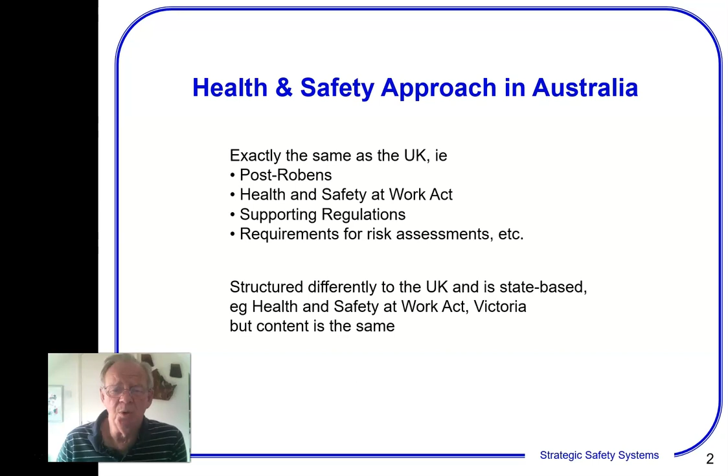So there's a Health and Safety at Work Act for Victoria, and there's a slightly different one for Queensland. For example, Victoria says there's a duty of care, in Queensland it says there's an obligation, but the same things are the same. You've got supporting regulations, much in the same way as we've got the COSHH regulations and the management of health and safety regulations, and there's a requirement for risk assessments, etc. So all of that, it's very much the same as the UK.

If we're just looking at the sites that we've got here, I'll mention this one. This is Comalco Minerals and Alumina. I should stress that I was working for Comalco, which was one of the companies within CRA, I'll talk about that in more detail. That's Comalco's Minerals and Alumina, they're at Weipa, and it's a site where bauxite is mined.

There's another one down here, Boyne Smelters Limited, BSL. It's a site which is managed by Comalco. I think Comalco got, or had, a 50% interest in Boyne Smelters at the time. It's an aluminium smelter, so we're taking essentially alumina, which originates at Weipa, and turning it into aluminium there.

We've got a site down here, Comalco Rolled Products in Yennora, a suburb of Sydney. They take solid aluminium, either as purity metal or as scrap, remelt it, cast it into blocks of about 8 tons, and those blocks are then rolled down into sheet material. There's two sites that do that: one at Yennora here in Sydney, and another one, Commonwealth Aluminum, at Lewisport, Kentucky, quite a long way away.

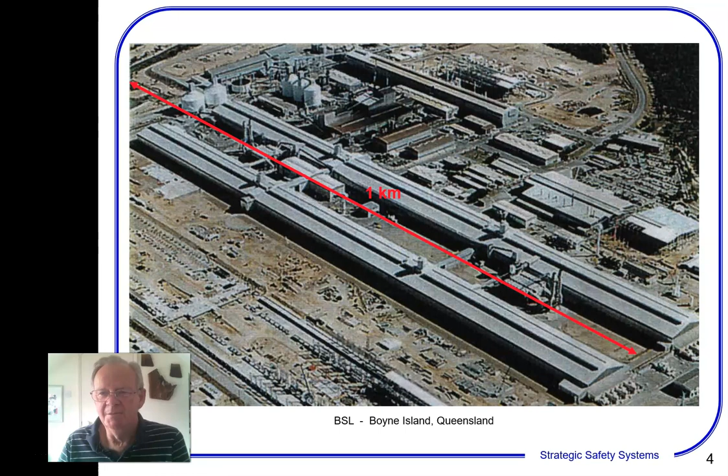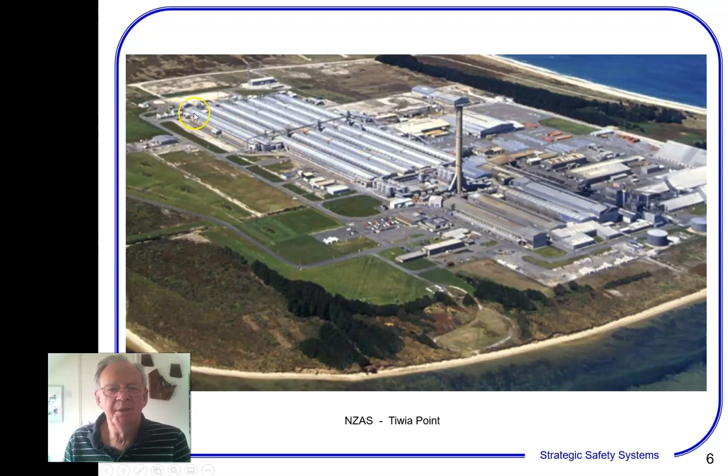If we look at that in more detail, you'll see there's again long sheds like this, 6 of them, 6 bays here, and you'll see why they are long bays like that. There's a 7th one which was added later on, and I was involved in that.

This is the kind of structure of personnel within CRA, what's referred to as strata.

Lots of people at stratum 1, so everybody was at stratum 1, everybody on the shop floor, etc. If you were to get a supervisor, a project leader, they would be at stratum 2. If you were like me and you were a manager, I was managing about 30 people at the time, then you would be at stratum 3.

So you could be a manager or a principal consultant at stratum 3. So here we're showing managers. I'm a manager of metal products and manager of carbon. You had another manager of reduction, etc. We go up to a site level. We've got the general manager who's at stratum 4, so we have a general manager for New Zealand Aluminium Smelters, another one for Boyne Smelters, another one for Bell Bay, etc. He was at stratum 4.

You also had chief consultants at stratum 4 as well, same level of complexity, the work of somebody who might have a plant with several hundred people there. At stratum 5, you had managing directors or vice presidents. So you had a managing director of Comalco Smelting, a guy called Carl Stewart at the time. You had a vice president of Comalco Research and Technology, a guy called Tony Kjar. I'll talk about him in more detail in a minute.

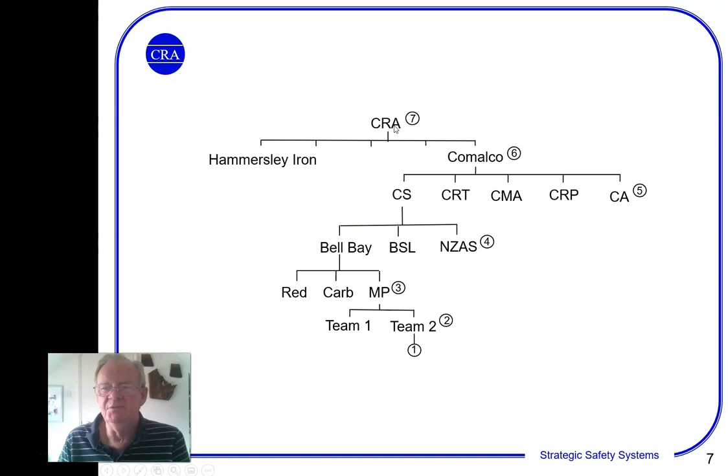Right, I'm going to talk about aluminium.

Comalco, the word Comalco comes from Commonwealth Aluminium Company. So we're talking about aluminium because that's where the dangers were that I was involved in. We start with this stuff, alumina, aluminium oxide, and you pump in a lot of energy to break the bond. And you end up with aluminium and oxygen. Right, I say lots of energy.

Well, how's that done? Well, essentially, we've got these kind of tubs here. You've got a case in there. It's got a carbon liner on it, and inside there we have a substance called cryolite, aluminium sodium fluoride, and that's at about 900 degrees C. And you dissolve alumina, your aluminium oxide, in there.

And coming into it, we've got these things which are anodes. And we pass an electrical current between the anode and the cathode, because that liner there, that carbon liner, is the cathode. The anodes get eroded away, so they get burnt away. So you'll see this one has kind of gone down a bit, and this one's a new one. And to keep this distance, the correct distance, this whole thing moves up and down.

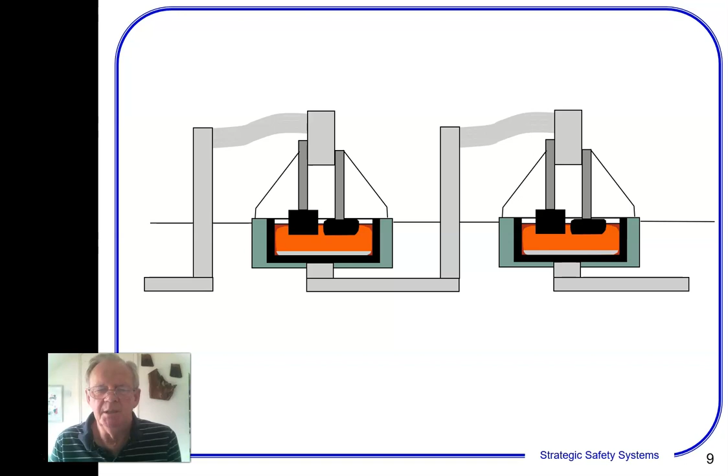Right, this is what it looks like in practice. This is a Comalco CD200 reduction cell. And these are new ones that went into New Zealand Aluminium Smelters. They're not the ones that were majority in use. That came in later. And you'll see this is the thing that goes up and down a bit in there.

Inside there, this is one of the cables bringing in the current. This is flexible. There are 3 of them. So you may guess from that, the size of that, you can get a feeling for just how big this thing is. But these, these are handles that you grab hold of to take those covers off. You may get a feeling for how much energy is involved by just looking at the size of that, and that's only a third of it.

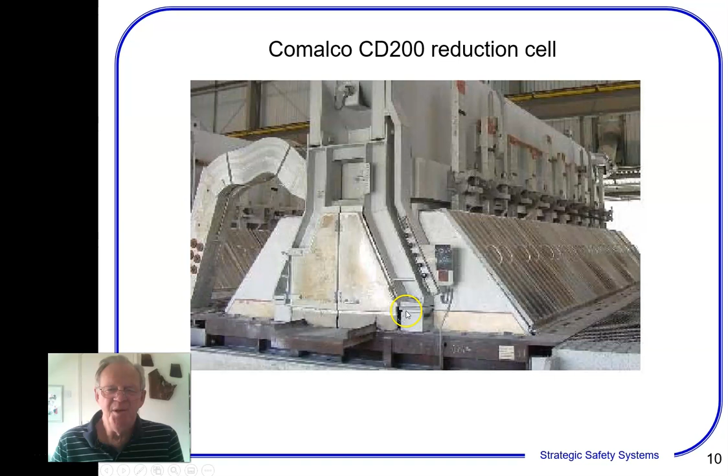And the actual energy you've got is that, this one is rated, the 200 in CD200 means that it can actually run at 200,000 amps. So there's 200,000 amps going through between the anodes and the cathodes, with a volt drop of about 4.2 volts.

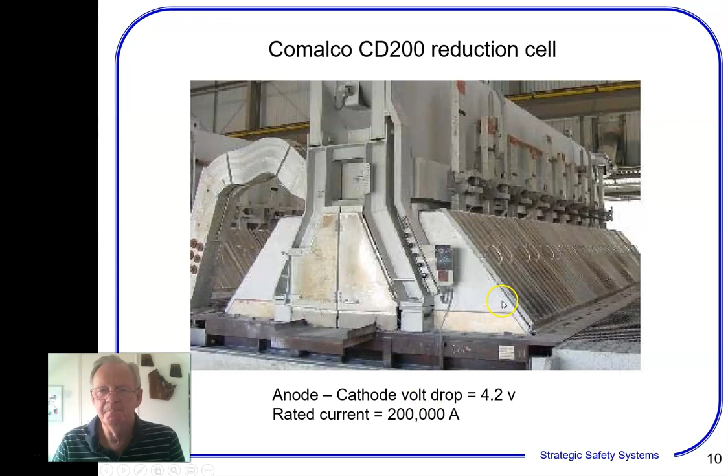In fairness, at New Zealand they didn't have 200,000 amps, they actually ran at 167,000 amps. But each one of those is about 750 kilowatts if you do the sums and multiply those up. So you're pumping in this vast amount of energy to produce aluminium and oxygen.

The only snag is that it can go back the other way. Aluminium can combine with oxygen to produce an oxide and release that energy that you pumped into it. It does this at any temperature, by the way, even at room temperature. The good news is that it only does it at the surface layer, so your aluminium in your aeroplane is not going to turn back into a white powder.

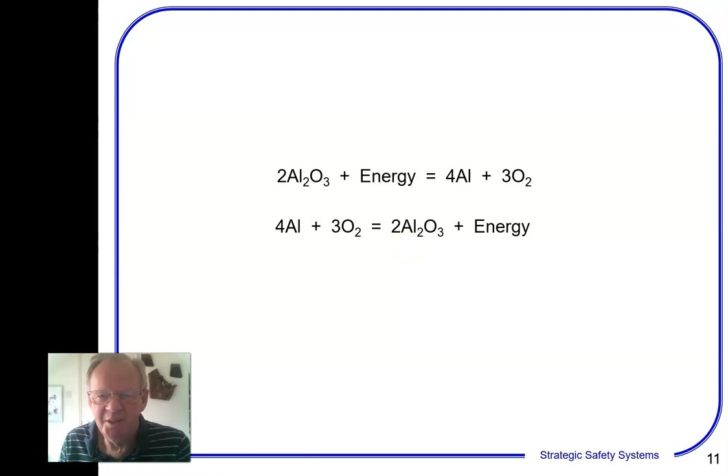It will only do it at the surface, so you've just got to worry about situations where you can get a new surface. As soon as you expose a new surface, this happens instantly as far as you and I are concerned, and you get lots of energy given off. Take something like molten aluminium - since it's molten it can do it at any temperature. It doesn't have to be hot to cause this, but it has to be hot to be molten. If you've got some kind of trigger which disturbs the molten aluminium, you get this kind of sequence.

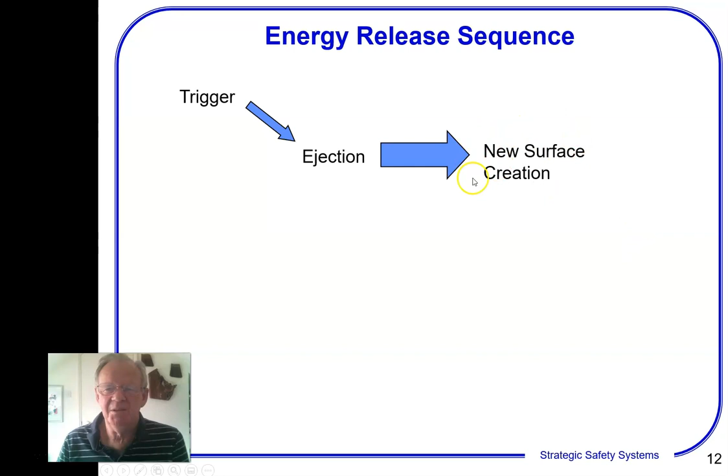The worst thing you can have is some kind of ejection - something which causes molten aluminium to be thrown up into the air produces a spray of molten aluminium, a lot of surface area, and instant generation of the oxide. So it gets thrown up into the air, a new surface is created, that new surface creation causes oxide to be formed, and that oxide formation means energy is released. Your nightmare scenario is if some of that energy goes round to eject more material, and then you get a runaway sequence.

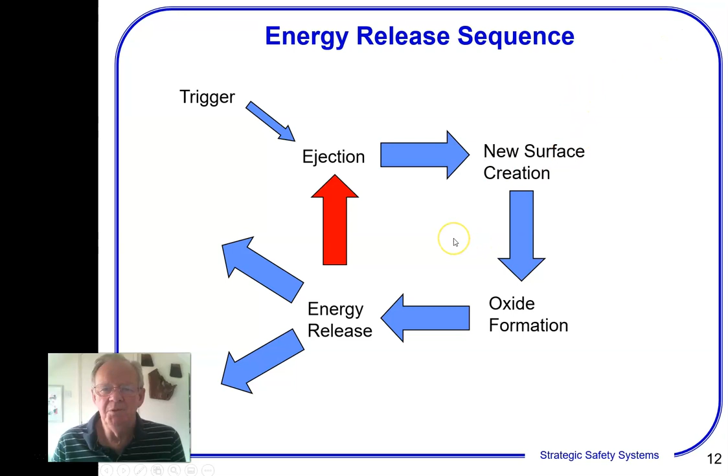You may call it a chain reaction. You get a runaway sequence, and you've got a major explosion. When I say major explosion, what are we talking about?

Well, this happened in 1979. As I mentioned before, Comalco Rolled Products melted scrap material and other purity material, and some of it had water running off it - it hadn't been properly dried. So it was about to be tipped by the crane operator into the furnace.

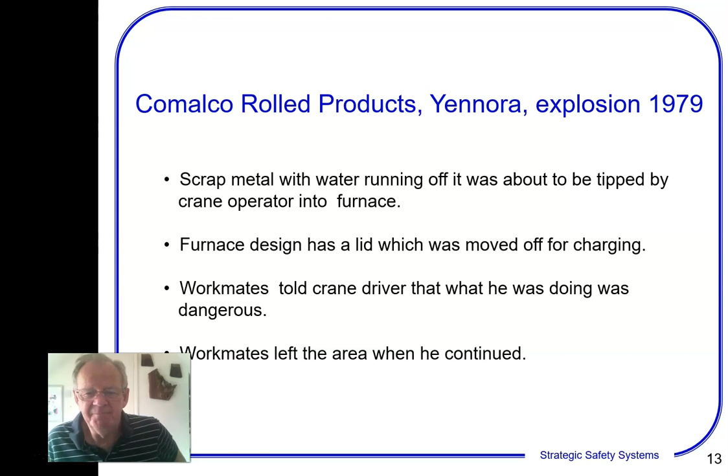Now the furnace design, as it stood at the time, was basically a round tub with a lid which was moved off for charging, and you dump the stuff in from the top. This guy was about to dump all this stuff in, and his workmates said, 'Don't do that, mate, that's bloody dangerous.' And he said, 'No, it's all right.' They legged it when he continued to do this.

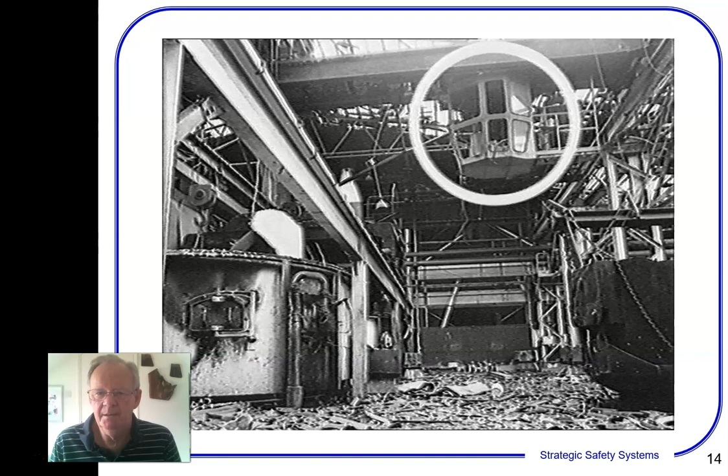And the result was this. The crane driver was sitting in his cab there. This is the furnace with the lid off it, and that's the level of destruction we've got within that plant. He was killed, obviously - unfortunately, not instantly.

This is another view of the plant. You can see how much destruction there is here. I don't have the picture, but I wish I did - but there is a picture that was taken inside this building, under this hole, and that's caused by a bit of block. Now when I talk about block, I mean this.

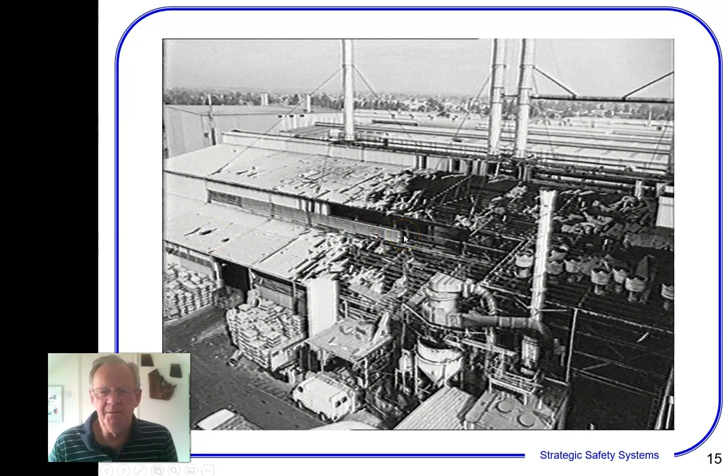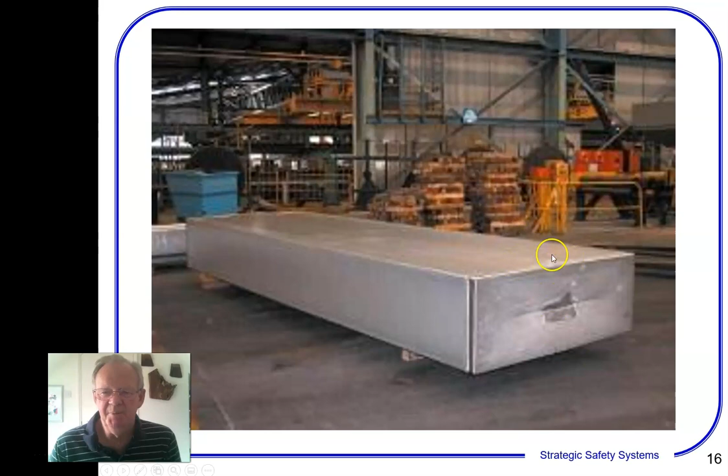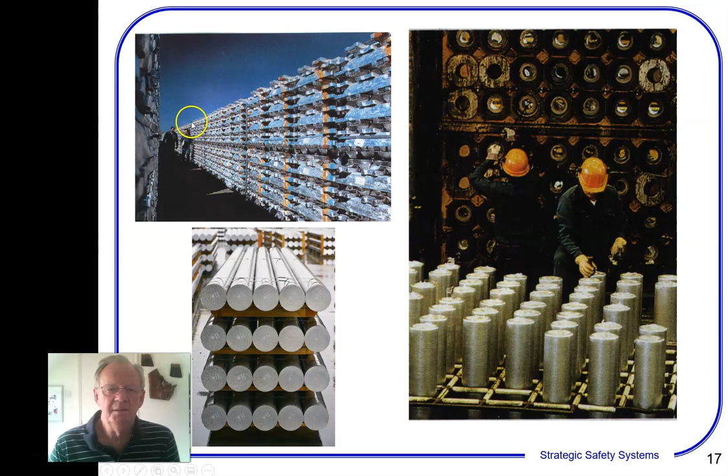This is ingot, which goes to be remelted. It's cast vertically.

The way it's done is through what's called vertical direct chill casting. You've got a furnace which you can tip up, and that goes into this trough, this launder, and it goes out to the mould. The mould is just this circular thing here, and it's got a base to it. The base is supported on a hydraulic ram.

You're pouring water onto this, so metal goes in and it starts to solidify, and as it does that, the ram descends and the product grows like that. You'll get water being sprayed directly onto the product itself, which is why it's called direct chill, and the thing will grow downwards like that.

You'd have as a product something like an 8 by 8 matrix of 172 billet, 172 millimeter diameter billet. 172 seems a bit strange, it's 7 inches. Strange situation there. That'd be about 7 meters long, or rolling block around about 5 meters long or so. The pit would be typically 8 meters here, and we've got water in the bottom of it.

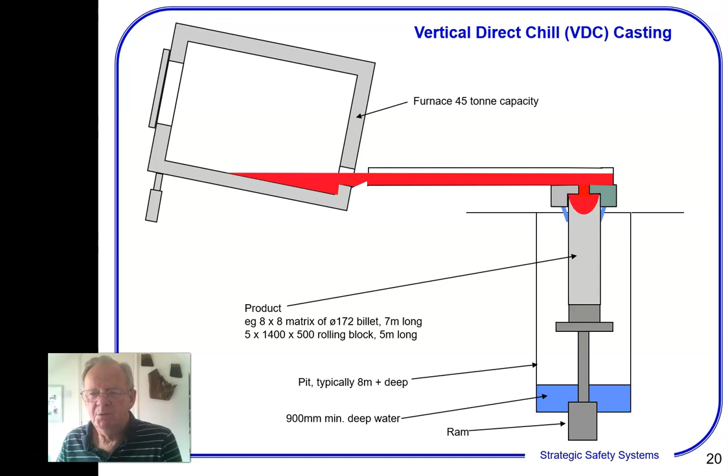Now, water and aluminium, molten aluminium, are not good bedfellows. If you put water onto molten aluminium, it's not a good idea to do it, but it will just sizzle and disappear. If you get water under molten aluminium, then it will expand dramatically as it turns to steam, and that expansion will cause the aluminium to be thrown out, and that's one of your nightmare scenarios.

Lots of things you can get here. As I said, you can get steam explosion with materials there, with bleed out into water or whatever. You can get a chemical reaction with oxides, because it will react with oxygen in any way. And there's another one which is a peculiar one here, which is lightning, which happened at one site.

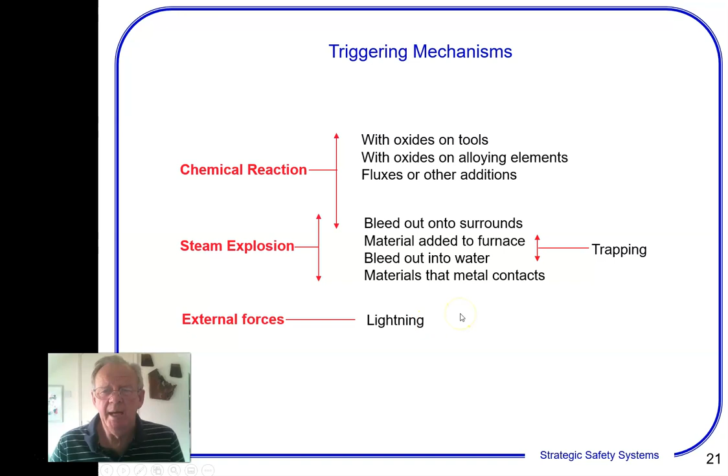Let's look at the types of aluminium explosions that we had. The one I've just mentioned before was at Yennora, our plant there, where the crane driver was killed, and that was caused by water. There was another one in 1986 where 4 people were killed at Simms Metal in Melbourne. That was caused by nitrates.

They were using sodium chloride as a flux, and that was being added to molten aluminium. But they also apparently used sodium nitrate within that plant, in the same kind of bags, in 25 kilogram bags, and it just so happened that somebody made a mistake and added bags of sodium nitrate to a furnace of aluminium, and up it went and killed 4 people.

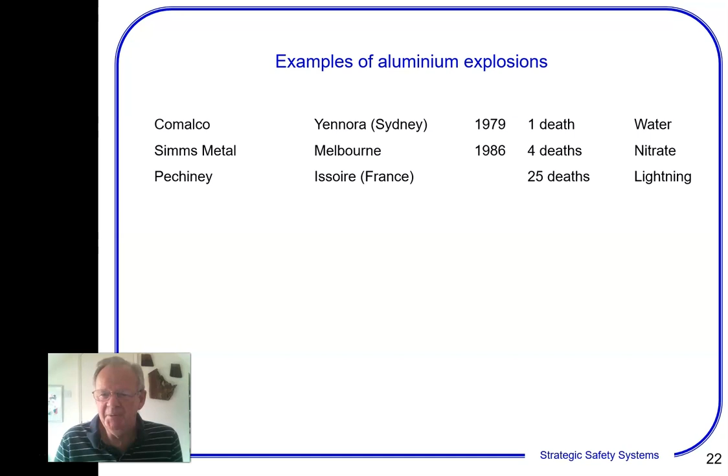The last one was at a smelter operated by Péchiney at Issoire in France, and that was caused by a lightning strike. We don't know the full details of exactly what happened, but we think it kind of arced across from a drain pipe, and that caused some molten aluminium being thrown up into the air. It virtually evaporated, and that caused a major explosion.

The molten metal safety approach: we decided, or the Board of Comalco decided in 1991, that they were going to re-look at molten metal in a serious way. And they did the following thing: they appointed a board member, so there was a board member who was made accountable. That was a guy called Tony Kjar, who was my vice president of Comalco Research and Technology.

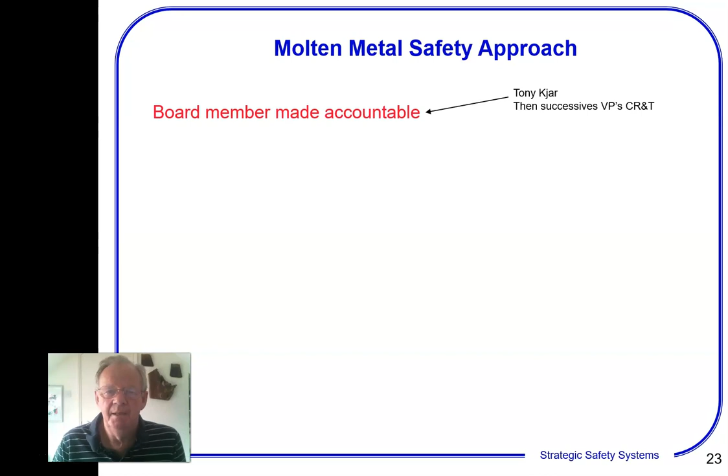He then nominated molten metal steering group members. This is the original 1991 molten metal steering group. Obviously you have Tony Kjar, who was the head of this, but then the key thing was that you had the key people from each site.

So these were the metal products managers. These were the people that were working with molten aluminium when it was being cast, when it was coming near water, for example. We had Dave Rowell from Comalco Smelting, Scott Thomas from Commonwealth Aluminum in Kentucky, and Russell Luxford from Boyne Smelters.

I had me from Comalco Research and Technology, but I was supported initially by one of my guys, Alan Clark, because I started working on this 4 days after I joined Comalco. So I'd moved my family across to the other side of the world, and 4 days later I was working on molten aluminium safety.

We had Bob Hartley from New Zealand Aluminium Smelters, Dave Solomon from Comalco Rolled Products. Now these other three were external people.

We used the services of Lindsey Mallen from ICI Australia. So he was a safety expert. We've got a safety expert, we've got the people who know the process, and this person is a key safety expert.

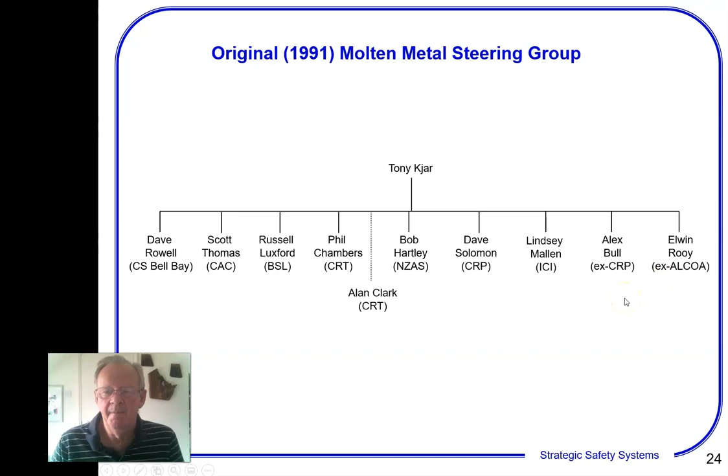So we've got the molten metal steering group members. I should stress that one of the problems with CRA was they did move people around a lot. As I said, I had 2 roles. That was not unusual. Most people in a Stratum 3 manager level would expect to move every 3 years.

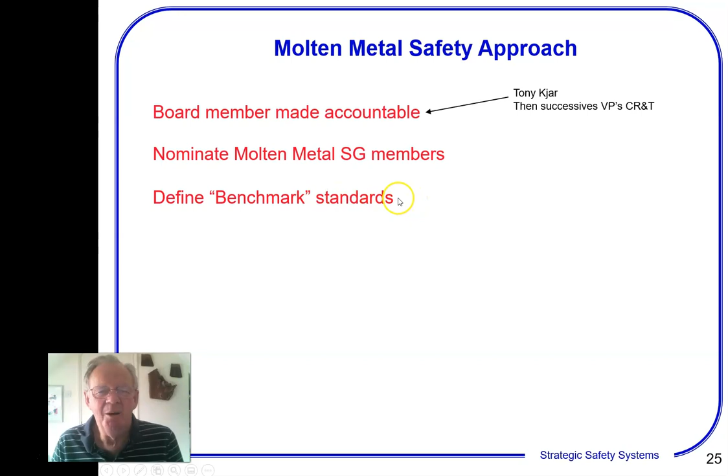One thing we did was to define benchmark standards, because you can't go and get an ACOP off the shelf. There was something done by the Aluminum Association, but we had to define our own standards. That was done originally by Alan Clark. Alex Bull added to it considerably over the next couple of years, and then I reworked it in 1995 to make it a bit more palatable, because it was getting a bit unworkable at that time.

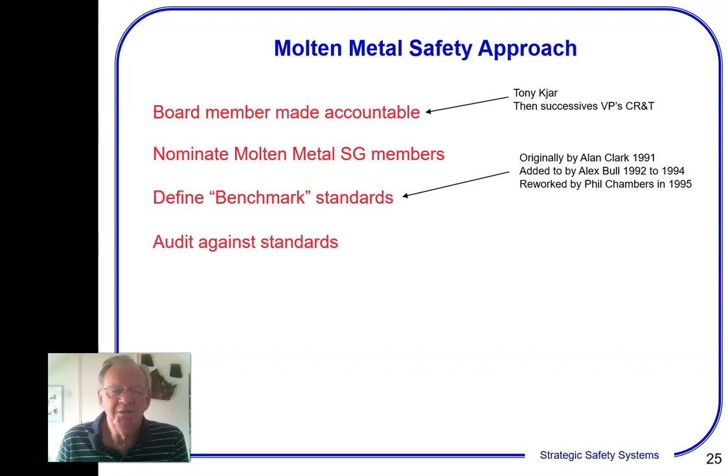We then audited against those standards. So we had key people from the molten metal steering group actually audit those sites. So you were being audited by your peers. This was a peer review.

At the end of the audit, they would provide a report, not a fully written report, but they would do a presentation. In those days, it was acetate slides for overhead projectors, written in hotel rooms at night.

Now, the important thing was that it was done as 2 presentations. The first one was to the workforce. This was incredibly powerful. You actually went and told the people who were at risk what the risks were and what the problems were before anybody else got to hear. The general manager got to hear about it later, but it was initially to the workforce with their managers present.

The key thing was that this guy was present, ARK, that's Tony Kjar, the person who is responsible at the top for this. So he was there at every presentation. He was seen to be committed to this. Everybody knew his face, everybody knew who he was. There was commitment right from the top, and it was visible commitment.

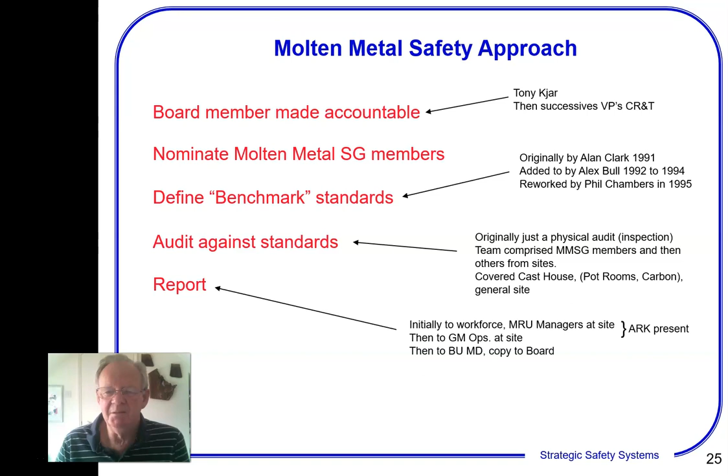There was an action plan that came out of it, but the audit team didn't specify what the action should be. They could offer recommendations, but it was down to the site to decide what to do and specify the action plan.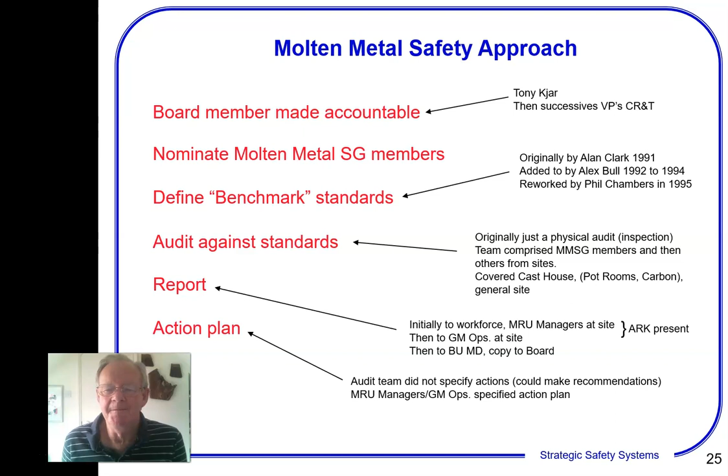There was an initial round of compliance audits in 1991. I wasn't part of the first one, at Bell Bay, Comalco Smelting in Bell Bay, Tasmania. I went to the one later in 1991 at New Zealand Aluminium Smelter. There were others all over the sites. But there were things that really needed to be done. There were some major problems here.

As people change roles, I mentioned that CRA was forever changing their people, particularly in manager roles, senior manager roles, and managing directors, who were moved quite often. But we always had a metal product manager or cast house manager from each site as part of the molten metal steering team, as part of the audit team. We did another round of audits over those two years, and we used other people as well. So we had people at Stratum 2 levels, supervisor levels, but also people at Stratum 4 levels, chief consultants. We mixed a whole load of people, but it was still peer review.

It was still done within the company, and then we stretched it to cover other things apart from molten metal. After a while, originally it was funded through Comalco Research and Technology, but after that it was financed out of your own budget. So to be part of the molten metal steering group, it came out of your departmental budget. But there was always a clamour to be on this team. We revised the benchmark standards and carried out some more audits.

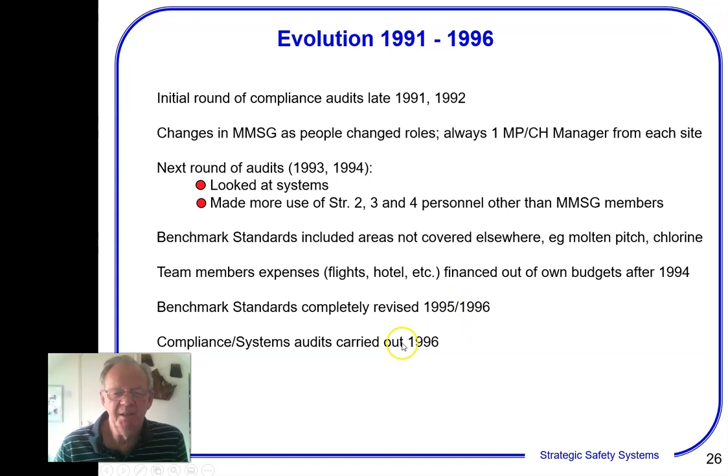The strength really was that it was targeted to real and serious hazards. Get this wrong, then there's an explosion, and with an explosion, people get killed. So this was a real and serious hazard, and everybody accepted that. It had the full enthusiastic support, and I can't stress this enough, the visible support of a board member.

As Tony Kjar moved on to other roles within CRA, his successors did exactly the same thing. It wasn't just him, it was inherent in the whole thing. It was driven by peer groups. It wasn't some bloke coming in from outside, it was by people that were working in exactly the same conditions as you at other sites.

And as a result, we got good transfer of practices. You'd get good practices, and somebody would look at that and say, that's a good idea, I'm going to take that back and apply it at my own site. And there was an awareness of bad practices too. They'd look at it and say, ooh gosh, that's a bit dodgy, I wonder what we're like, we'd better check up on that.

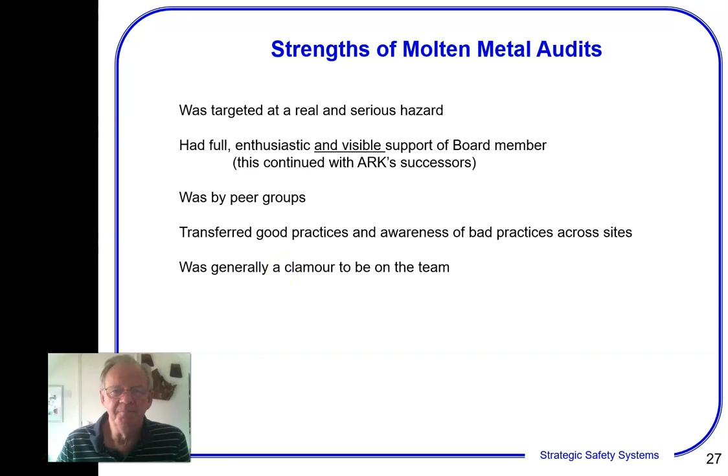There was generally a clamour to be on the team. It was actually seen as a career-enhancing move, particularly within Comalco Smelting, because of the enthusiasm of just how well it was working, and the enthusiasm of the managing director. So it was a really good situation.

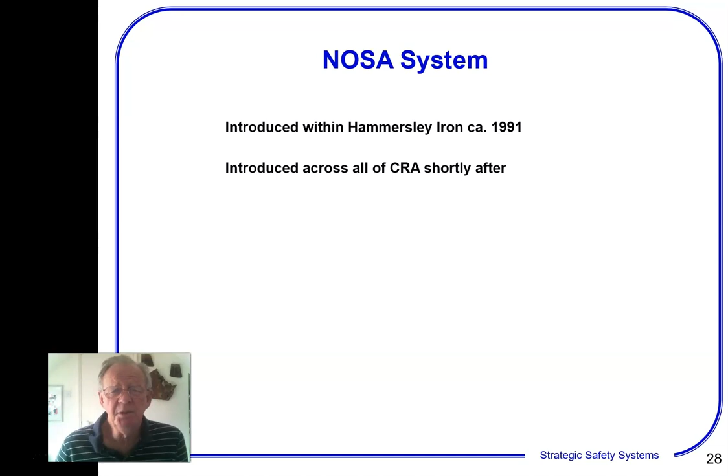Now I'm going to compare it with this, which is the NOSA system. It's a South African system, National Occupational Safety Association system. It was introduced within Hammersley Iron, that's one of the other groups within CRA. It was introduced around about 1991, which is when we started to introduce the molten metal thing within Comalco. It was introduced across all of CRA shortly after that.

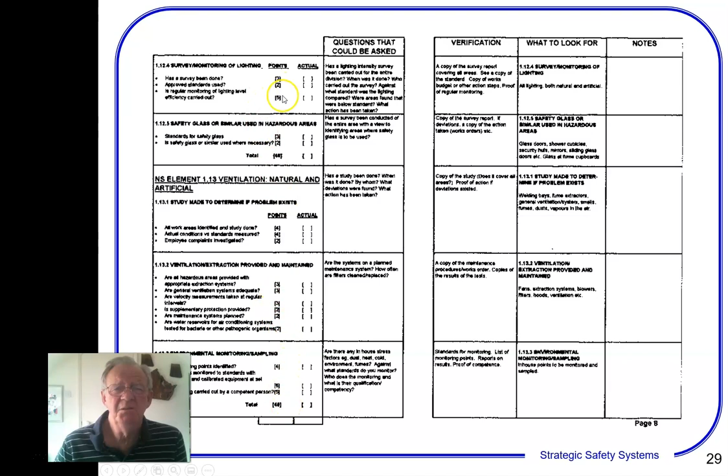And what you had was a little green book. I do apologise for the quality of this. But basically there was a book, and it had lots of questions that could be asked, looking at things you'd go into, and you see these numbers here, and these are scores. So you'd actually get a score against it. And if we looked at the whole list of stuff, you'd find you get this scoring thing down here.

So, for example, machine and hazard guarding, you could get 100 for it. Incident and hazard reporting, again 80. Now this is strange - this one here, personal protective equipment, 65. Most in-line people would actually put personal protective equipment as the last-ditch method, but here we're actually saying it's so important we give it a very high score.

Now if you're a manager and you're being held accountable for getting a good score, and that's what was actually happening, then what are you going to do? You're going to put all the effort into what gives you the biggest scores. So this is where you put the effort in, and you ignore some of the stuff down here, for example, work permits, permit to work - well, that's very limited. The other thing you might notice here is there's some whopping great gaps. There's nothing about risk assessment.

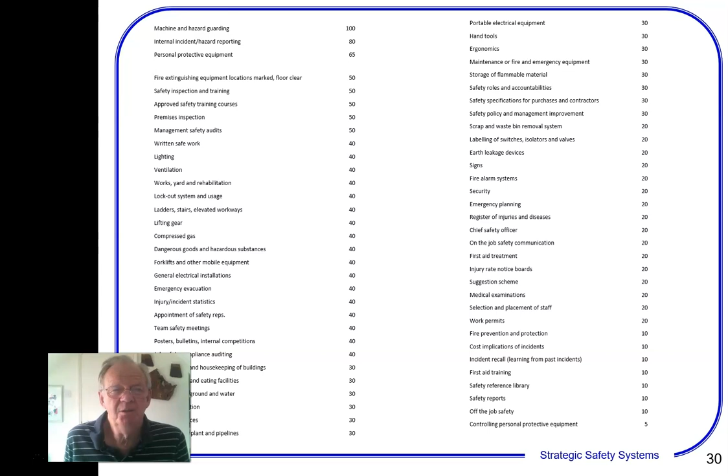Risk assessment is a legal requirement of the Australian system, same as in the UK. It's not a requirement of the South African system, which this came from. So risk assessment wasn't there. Nothing about manual handling - manual handling accounts for about 40% of the injuries that we get, however, no, it's not covered in this. There's nothing about confined spaces. So there's some whopping great gaps in here.

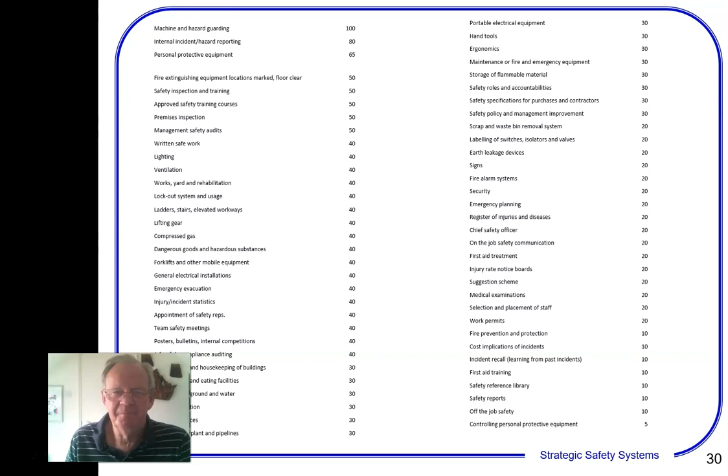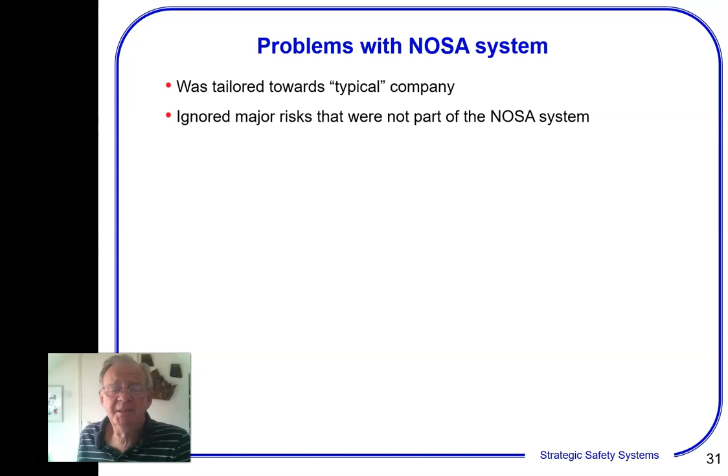So the problem we get is that it's tailored towards a typical company. We ignore these major risks if they weren't part of the system. It didn't address the legal requirements - as I mentioned, there was a requirement within Australia to carry out risk assessments, well, it's not in there, so we ignore it. It did introduce spurious requirements - I could give you some examples, but I won't - and it diverted attention away from the real problems.

So molten metal safety wasn't considered, neither was confined spaces or manual handling - we ignored that. And there was no transfer of practices between sites. The molten metal steering or management system was good because people were learning from different sites and carrying out - you actually found out good things and bad things about other sites.

Because it was resented by, because it didn't tackle the main things, it was resented by most people.

I always remember one of my colleagues who managed health and safety at the smelter at Bell Bay. He told the auditor when he came in, right, we've had 3 instances since the site was commissioned, which was in 1955, where a person has had a foot amputated. Basically, they've gone through the crust and put their foot into cryolite. And the auditor was not the least bit concerned about that. He was saying, well, let's have a look at your lighting survey. He had no respect whatsoever.

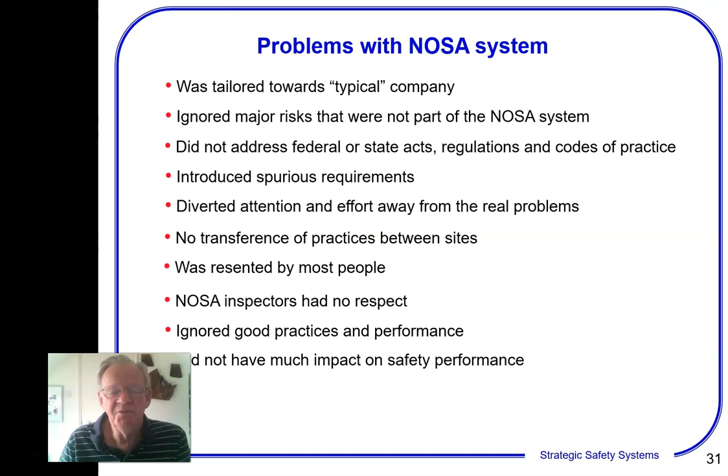I was lucky because when I was asked to implement the NOSA system at my site in Melbourne, I told my vice president at the time that the NOSA system had lots of holes in it, some real major problems. And he said, don't worry about the NOSA system and the score you're going to get. Do the things which are right. If you get a poor score, that's my political battle, I'll cope with that. You get things right. So I was allowed to do things which were outside the NOSA system and get on with other things as well.

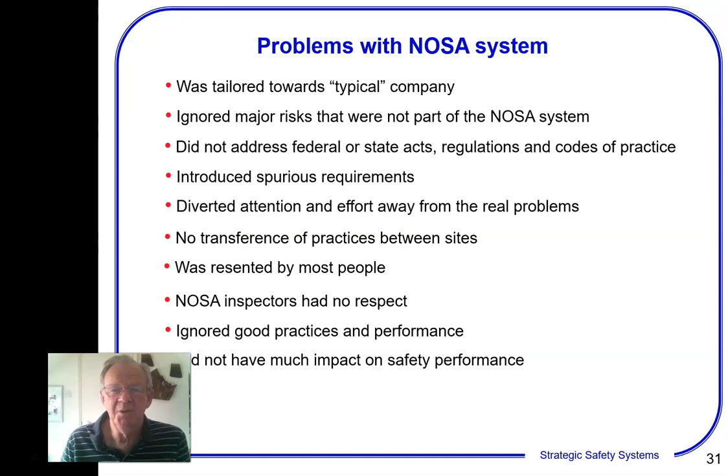Let's have a look at how well it worked. Well, it made an improvement. So across the whole CRA group, the lost time injury frequency rate went down, from around about 21 to 18. It was an improvement there.

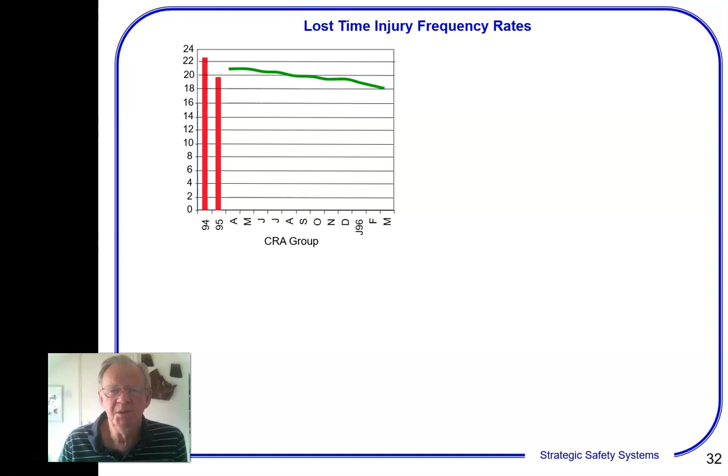If we look at the effort ratings, the best one in the whole group was Hammersley Iron at Dampier, the port site there. They've got a 91% rating, so that was great.

Best in CRA. Because I was allowed to do things which didn't give a good score, and to ignore some of the things which did give a good score but were meaningless, I got a lousy overall score, 54%. However, our lost time injury frequency rate just went down, down and down, and if we were to plot it out for 96, we actually stopped injuring people. So we did that from a lousy score.

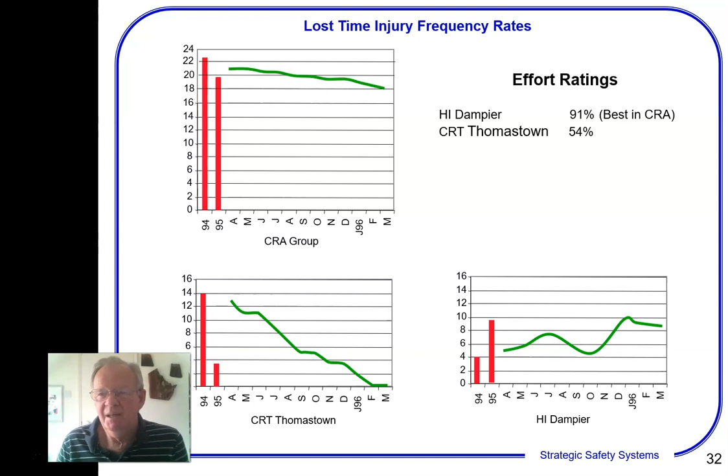What happened at Hammersley Iron at Dampier, who got a wonderful score there? Well, you actually find that it got worse, because they were putting all their effort into tackling things which gave them a good score rather than things which actually made things better.

So the lessons that we've learned from this, and this has really driven my whole approach to health and safety management for the last 25 years. First of all, systems need to relate to the risks that are present, not some spurious checklist. You don't go in with this checklist and work to that. Systems need to be concise, you don't go in for a lot of waffle. You must know when to stop. If you pay pedantic attention to minor detail, then you lose focus, and the important things will get forgotten.

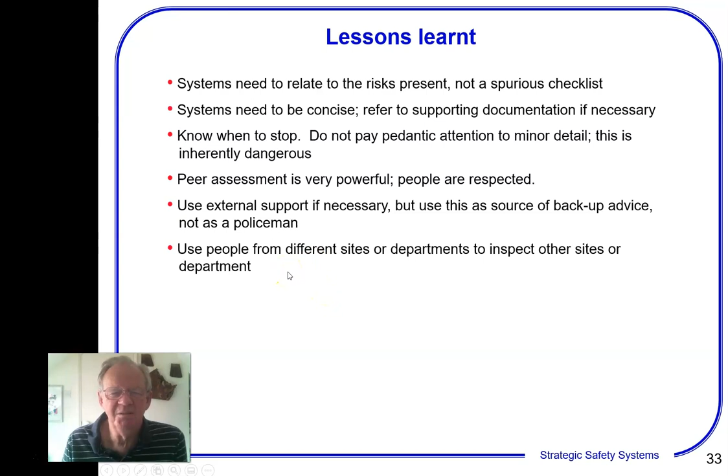Next thing is peer assessment is incredibly powerful. People are respected, if you're respected and audited by your peers, it's far better than somebody from outside. You may need to use external support, I'm not going to turn down work, but you use this as a source of backup advice and not the policeman, because if you only do the right thing when that person turns up on site, then it ain't going to work. Then ideally we use people from different sites or departments to inspect other sites or departments, peer assessment where possible. Unfortunately, most companies don't do that. It's a shame because they really are missing out.

Well, that is all my experience from managing health and safety within CRA and what I learnt from it over a 5-year period. I hope you've enjoyed this.